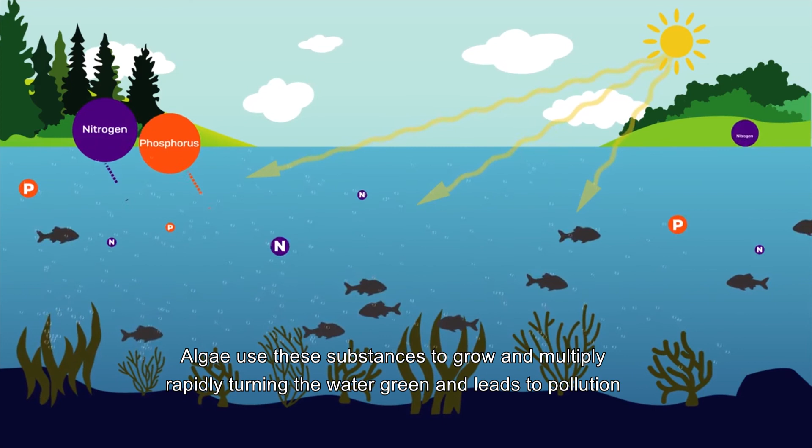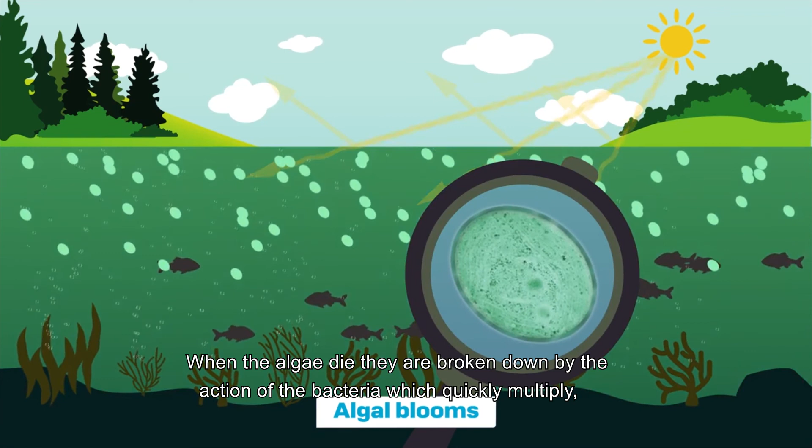Algae use these substances to grow and multiply rapidly, turning the water green and leading to pollution. When algae die, they are broken down by bacteria, which quickly multiply, using up all the oxygen in the water, which leads to the death of many animals.

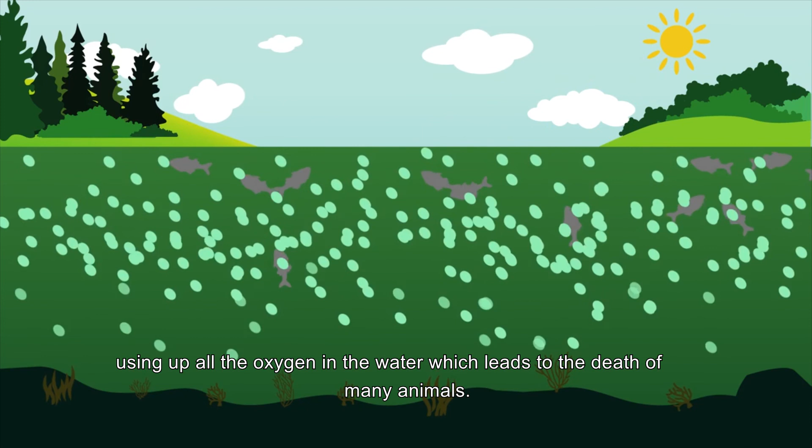Next, chemical waste products from industrial processes are sometimes accidentally discharged into rivers. These sometimes enter the water in such high concentration that fish and other animals are killed immediately.

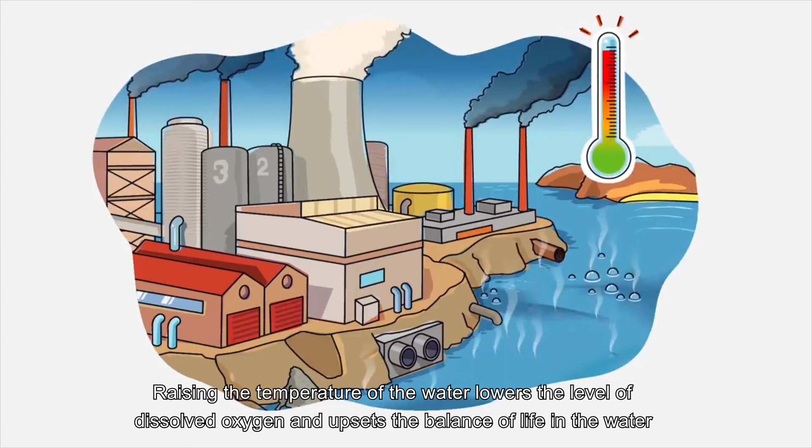Factories use water from the river to power machinery or cool it down. Dirty water containing chemicals is put back into the river. Water used for cooling is warmer than the river itself. Raising the temperature of the water lowers the level of dissolved oxygen and upsets the balance of life in the water.

Lastly, people sometimes carelessly throw rubbish directly into the river. This happens because they do not have enough awareness toward river pollution.

Furthermore, the effect of river pollution is that contaminated water will cause health problems for humans. Humans will get sick when drinking or using contaminated water. Waterborne pathogens from human and animal waste are the major cause of illness from contaminated drinking water. Health risks related to polluted water can cause different diseases such as respiratory disease and cancer.

Poor quality water destroys crop production and affects our food, which is hazardous for aquatic life and human life. It can also cause the disappearance of biodiversity and aquatic ecosystems.

This pollution must be solved immediately. Now I will show you the engineering solution for this issue.

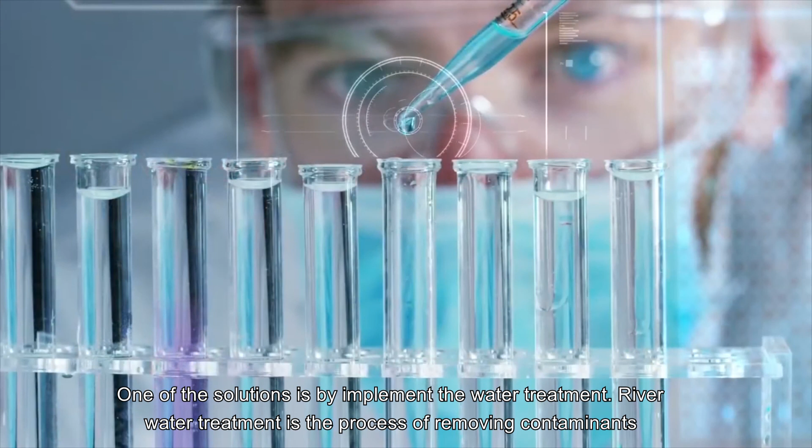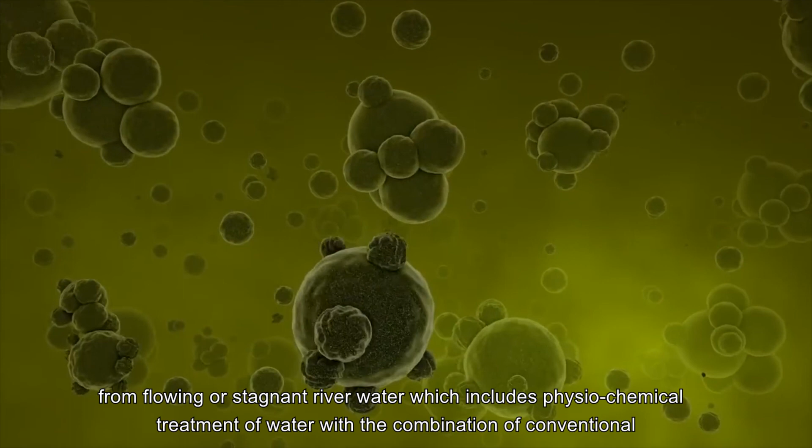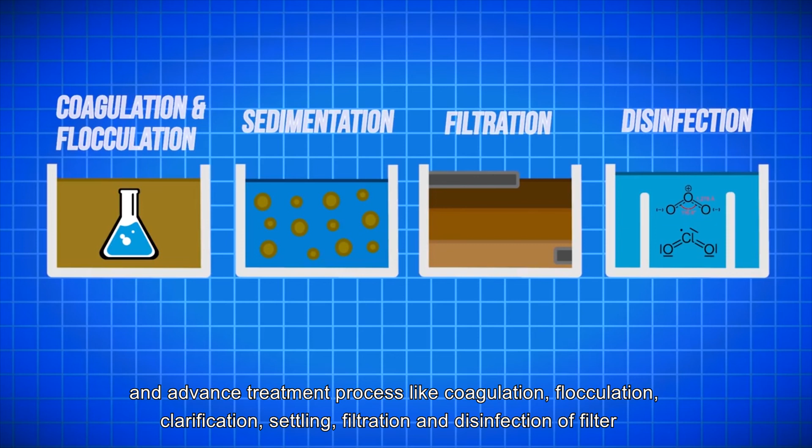One of the solutions is to implement water treatment. River water treatment is a process of removing contaminants from flowing or stagnant river water, which includes physiochemical treatment of water with a combination of conventional and advanced treatment processes like coagulation, flocculation, clarification, settling, filtration and disinfection of filtered water, to produce an environmentally safe and pure water suitable for drinking and multiple use in domestic, institutional and industrial applications.

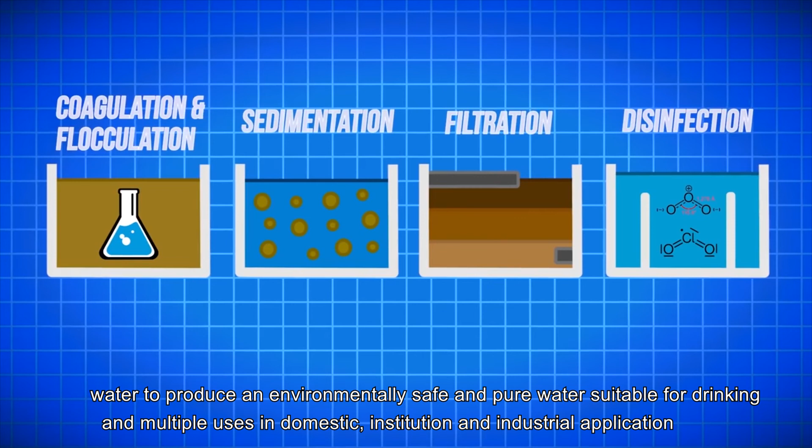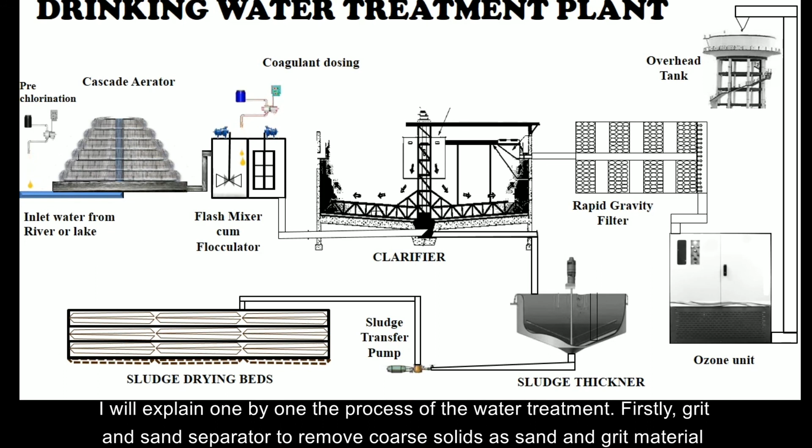I will explain one by one the process of water treatment. Firstly, a grit and sand separator removes coarse solids such as sand and grit material. Then chemical disinfection reduces the bacterial content.

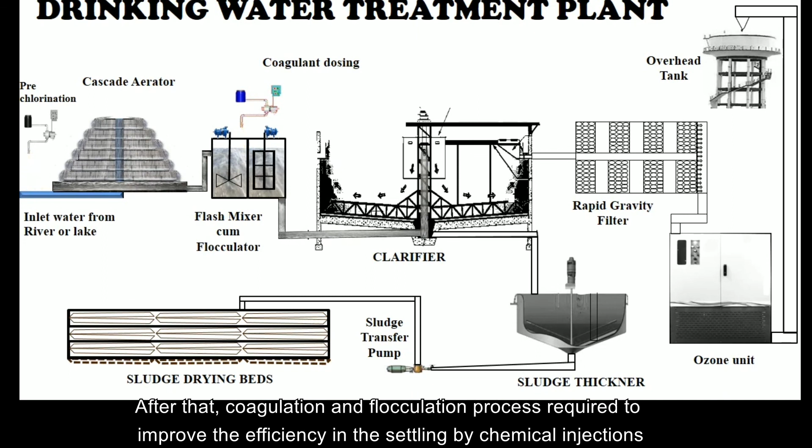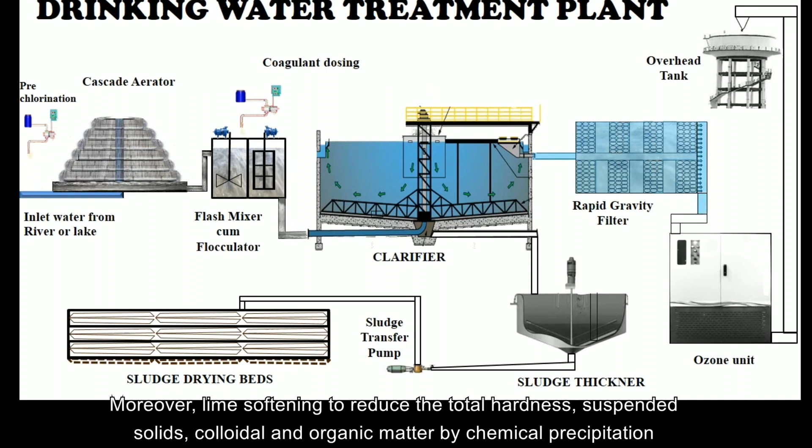After that, coagulation and flocculation processes are required to improve the efficiency of settling through chemical injection. Moreover, lime softening is used to reduce total hardness, suspended solids, colloids and organic matter through chemical precipitation.

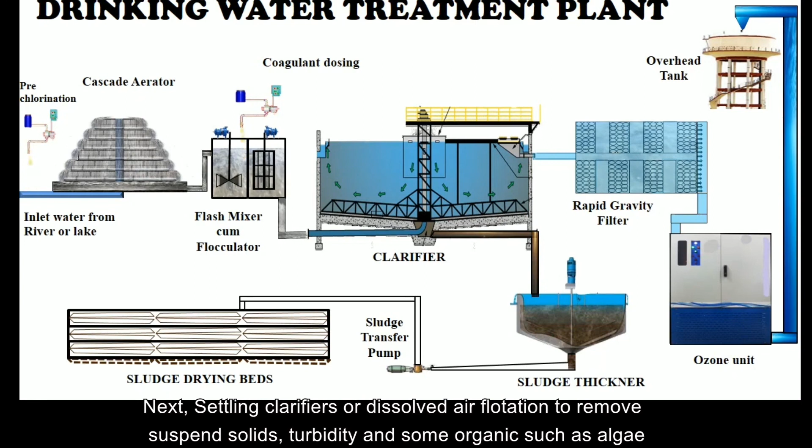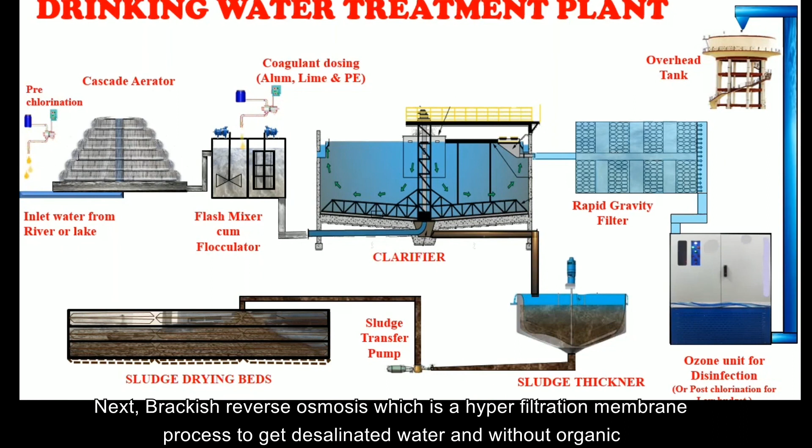Next, settling clarifier or dissolved air flotation removes suspended solids, turbidity, and some organic matter such as algae. Furthermore, a granular filter is used for total removal of very fine suspended solids for turbidity reduction. Next, brackish reverse osmosis, a hyperfiltration membrane process, gets desalinated water without organics.

Lastly, electrodeionization process achieves ultra pure water quality. This is the water treatment that will give us safe water to drink or use.

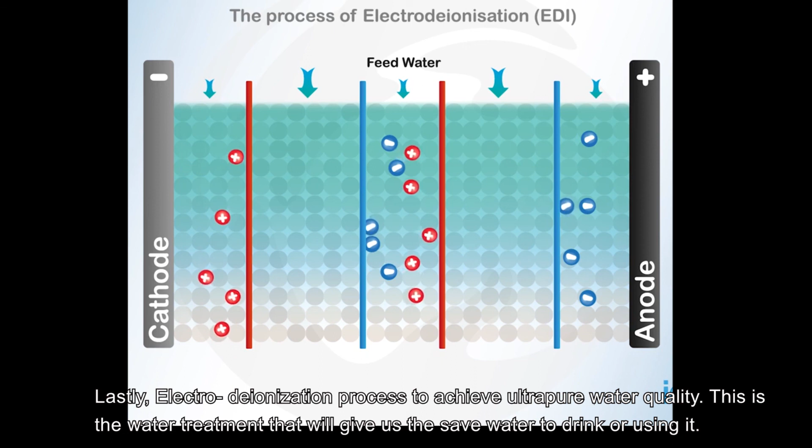Other than that, there are new initiatives that have been introduced by the Ocean Cleanup Organization, which is the Interceptor. The Interceptor is a ship used to intercept plastic pollution in rivers. There are two interceptors currently installed, on the Klang River in Kuala Lumpur, Malaysia and in Jakarta, Indonesia.

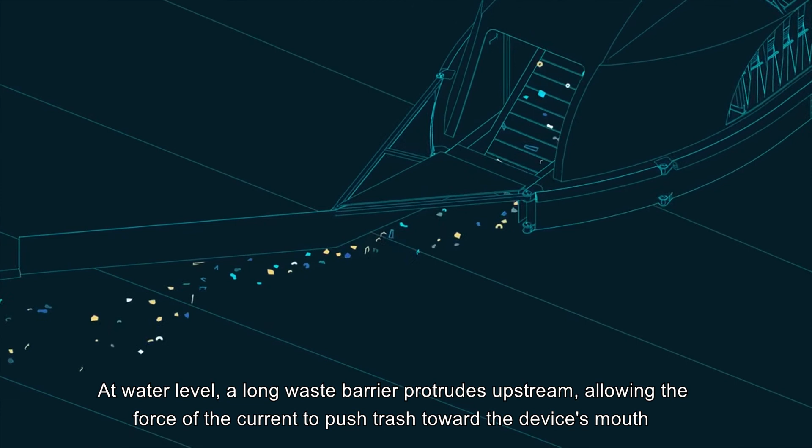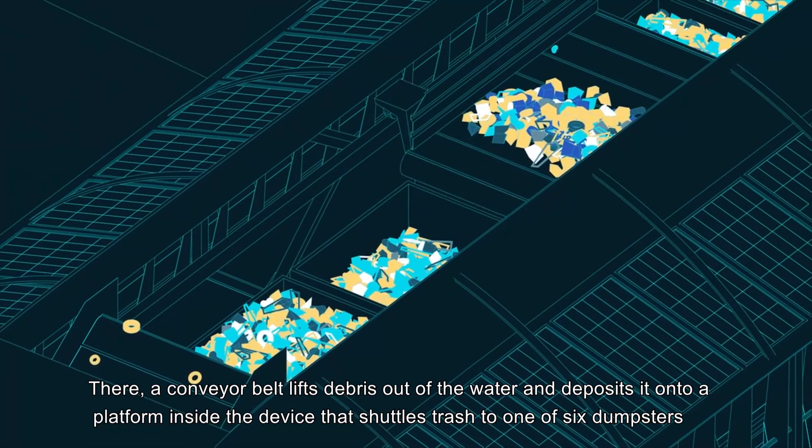The interceptor is powered by solar panels located atop its wide interior shell. At water level, a long waste barrier protrudes upstream, allowing the force of the current to push trash towards the device's mouth. There, a conveyor belt lifts the debris out of the water and deposit it onto a platform inside the device that shuttles trash to one of six dumpsters.

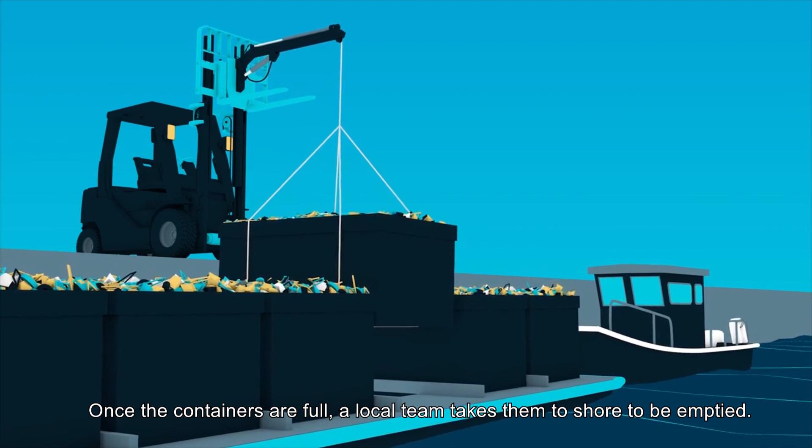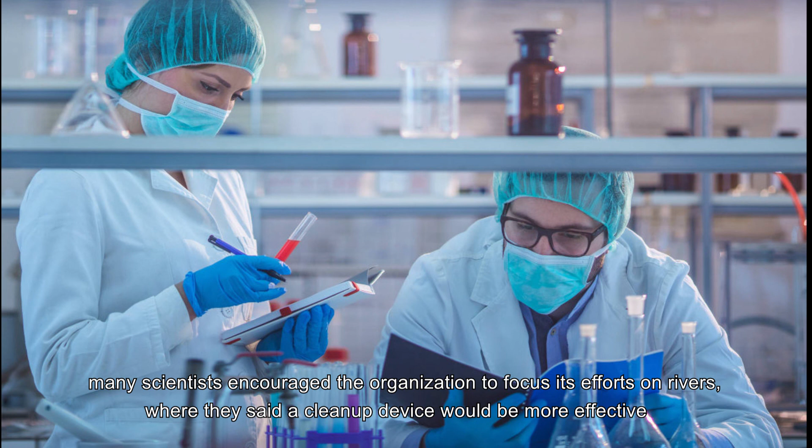Once the containers are full, a local team takes them to shore to be emptied. The latest interceptor design can extract 50,000 kg of plastic per day. Over the course of the project, many scientists encouraged the organization to focus its effort on rivers, where they said a cleanup device would be more effective.

Next, I will present the non-engineering solution for this issue. The other solution is making river cleaning campaigns. The Clean River Campaign is an education program designed to raise awareness among people that we should take good care of our water resources.

The campaign has been held every year in Malaysia with the slogan 'Love Our River.' This campaign gathers a huge number of people to clean the river together. The campaign aims to turn the river into a vibrant and conducive spot for tourists.

Thus, increasing awareness among local communities is required to change their attitude towards the river and strengthen their participation in various activities. From this, we can conclude that river cleanliness is our responsibility.

It's recommended that there should be a proper waste disposal system and that waste should be treated before entering the river. Educational and awareness programs should be organized to control the pollution.

The solution must be fully implemented to make sure the cleanliness of the river can be preserved for our future generation, so that our future generation will not suffer bad impacts because of our actions. It also helps preserve the aquatic ecosystem from exposure to toxic pollution.